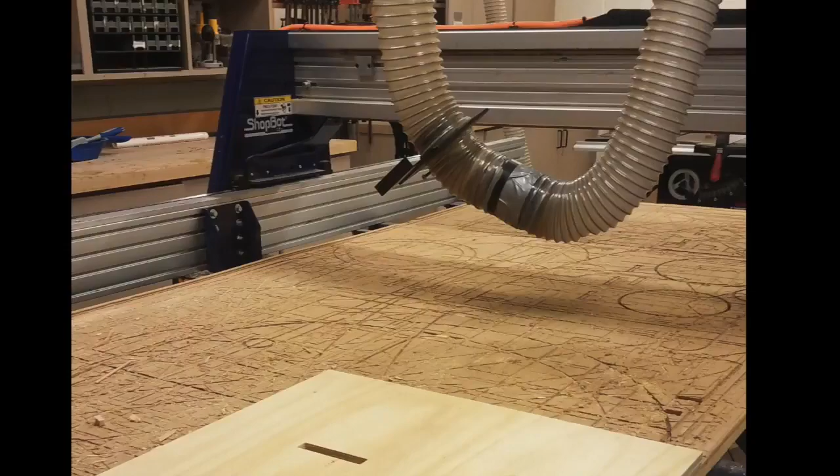Hey, I'm Ethan Bishop. Today I'm going to be showing you how to go from a completed VCarve file to ready to cut in the Shopbot. So here's my VCarve file.

First of all, before we go to the flash drive and Shopbot computer, there's a couple of things we're going to check. Make sure all our dimensions are correct, thickness is correct. Normally I like to zero to the top material because the Shopbot bed's pretty beat up, so it gives a more accurate reading. Then over here, we're going to double click on this, check some material setup settings.

We're going to check the thickness, just zero again. We want the clearance above to be about 1 inch. You can put as high as you want, this is just for fast travel. We don't want it to be too close to wood for risk of hitting something. And we just want to make sure the home start position is something sane so it's not going to go crazy.

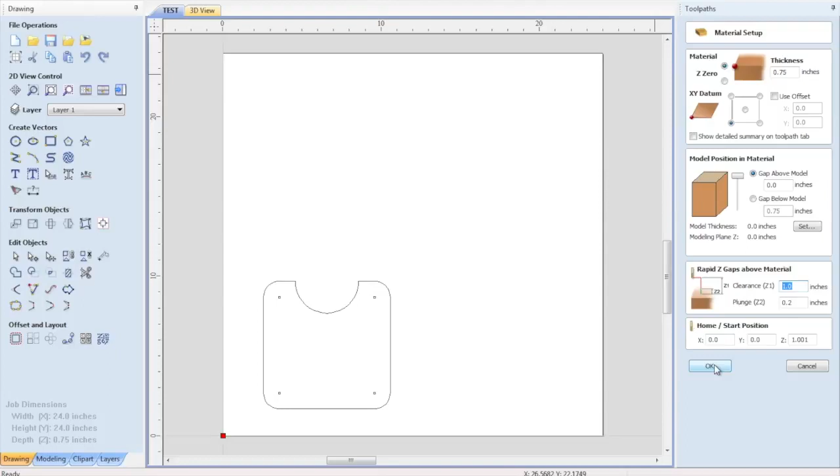And then we're going to go ahead and save our VCarve file. Save as. We're going to upload it to Drive real fast. I already have it in Drive, and then from Drive we can go back to the Windows side of our machine and we can download the file to the flash drive and transfer it over.

Okay, so once we move our file over, we're going to open it on flash drive, double click, open in VCarve real fast. It's going to be the same thing as on the laptop.

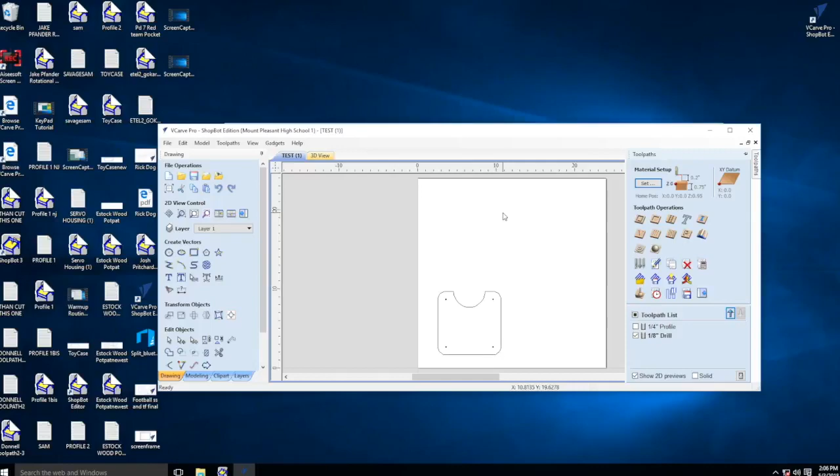So from here, what we're going to do is we're going to secure our material down to the workbed. So my material here is 20 by 24 or 24 by 24. So I'm going to place screws around the corners far away from the material. And I can use this little numbers down here to measure out for my screws. So I know after 1 foot this way, I'm clear to place a screw over, and after about a foot this way, I'm clear to place a screw wherever too. So we're going to go ahead and do that.

So after we screw down the material, we're going to go ahead and start to zero. So as you can see with the keyboard in this orientation, the arrow keys will move the different axes, left to right. Page up and down will move the Z up and down. So after we know how to move that, we can go ahead zero to zero.

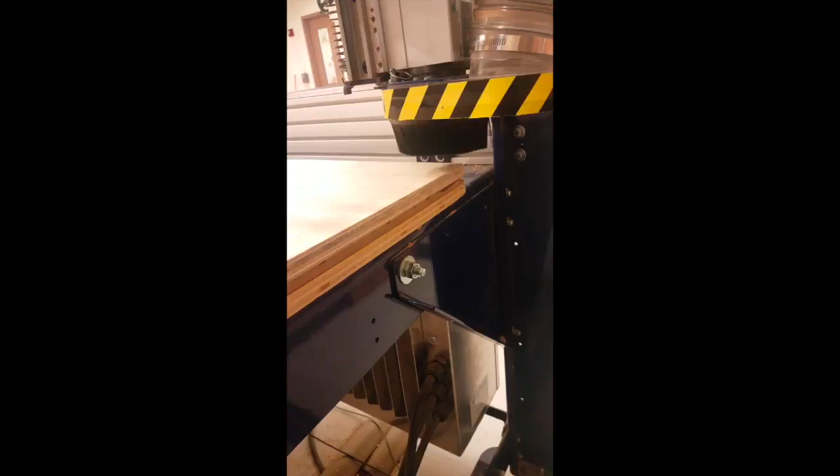We're going to lower it just above our workpiece. Then we're going to move the X and Y so it's right on the edge of the material. In the computer, we're going to determine this as a 0 point, so it's going to cut our piece in the right location. So let's go ahead and do that. See, right on the edge.

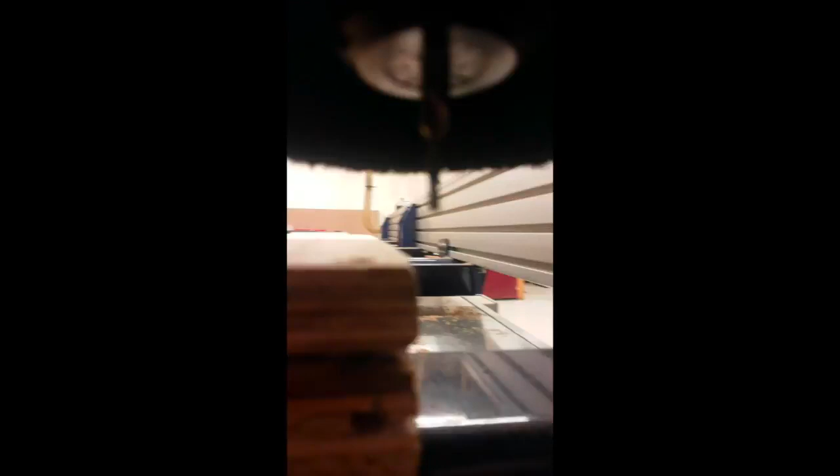So here we go to the yellow box. We're going to go ahead, as you can see here, as we move it around with the keyboard, you can see the values here moving. So once we have the X and Y in the location as we just showed before, we can click 0, X, Y, and we'll click 0, and that's going to tell the computer that this is a 0 location. And so then we can go ahead and close the yellow box.

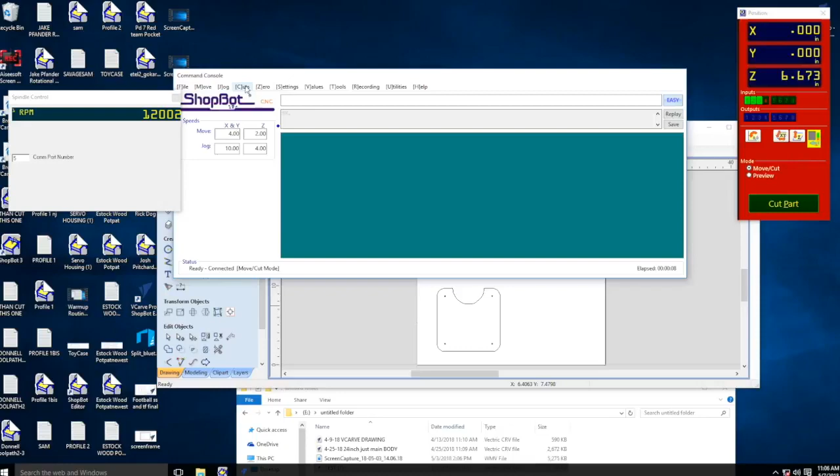And now we're ready to zero to Z, which for this we're going to have to use a different method. So first we're going to click Cuts, and we're going to be using C5, which is zero to Z axis with the zero plate. Click that, C5, and then we have to go ahead and get out the zero plate.

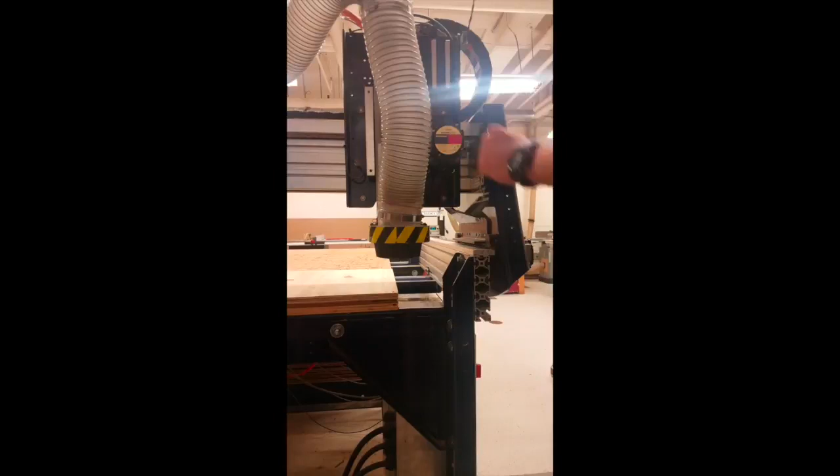So it's going to tell us to get out the zero plate. We're going to go to the machine, take that out. There's a little clip too, plate and clip. We're going to place the plate immediately under the bit, put the clip onto the bit, making sure it's not going to fall off. Once that's in place, we're going to go ahead and hit C2 again.

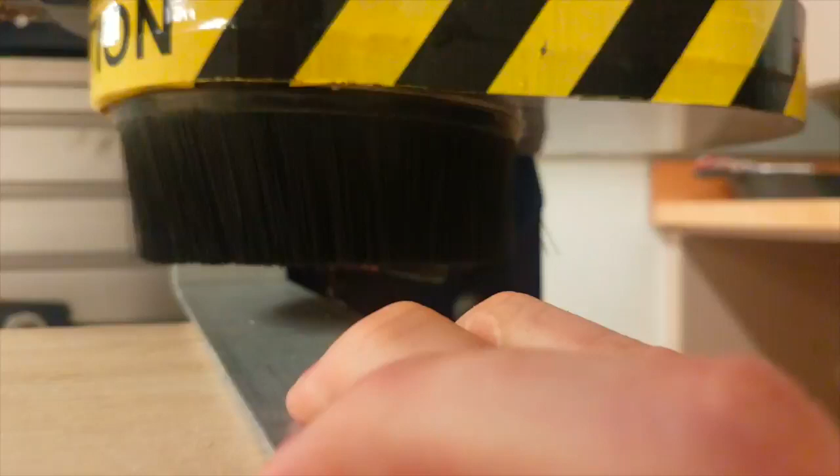We're going to hit OK to run because we're over the zero plate. The machine's going to lower the bit, hit the plate, go up once, down again, and go back up. Then we can go ahead and put away our stuff. After that, we're going to start dust collection, and we're now ready to run the file.

Okay, now since we have everything zeroed, X, Y, and Z are all zeroed, we're ready to send our toolpaths out to the machine. So first of all, we want to close the yellow window, because if that's open, it's going to mess it up. It's just not going to work, so we have to make sure that's closed first.

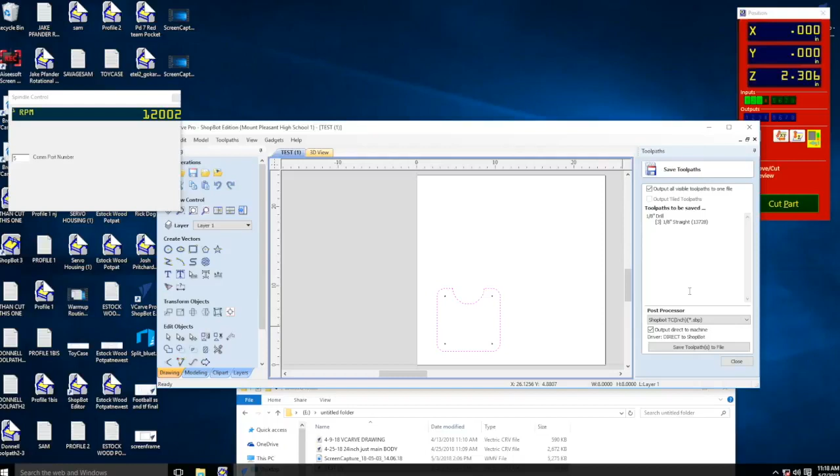Since we have the 1/8 inch bit in the machine, I'm going to select the 1/8 inch bit. I'm going to hit Save Toolpath, make sure output direct to machine is checked, hit Save Toolpath file, save it randomly, hit Enter, Enter again.

And then it's going to prompt us to turn on the spindle. So this is where you turn on the spindle, you hit OK, and then the file will run your machine. I'm not actually going to run this today, so I'm just going to hit cancel.

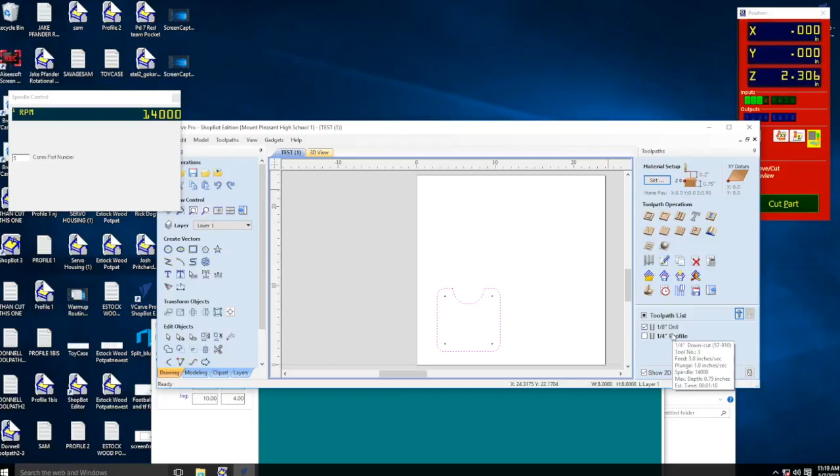And after that, since my next toolpath requires a straight bit, or a 1/4 inch straight bit, I'm going to have to change bits in the machine, so let's do that real fast.

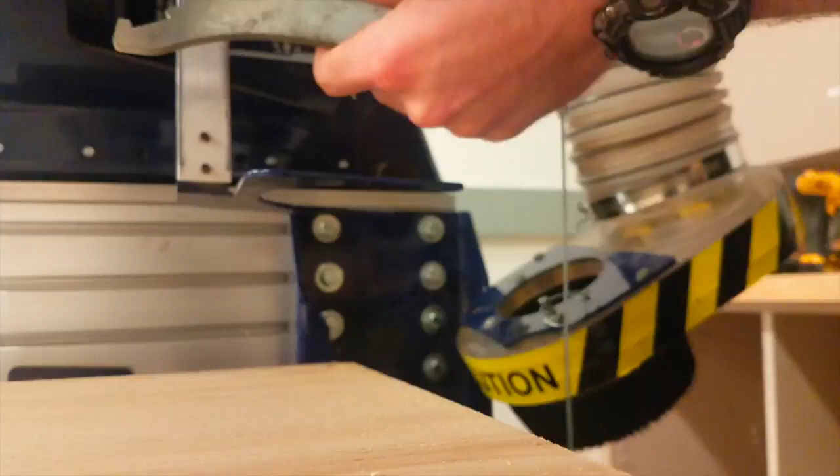Okay, so here's just a brief overview of how to change bits. We'll first get our spanner wrench, or get out our crescent wrench. For this, we're going to have to remove the dust collection, which is a little complicated. We just loosen the knob, pull it down, pull the pin, pull it out. This is just a brief overview, so it's not going to tell you exactly what to do.

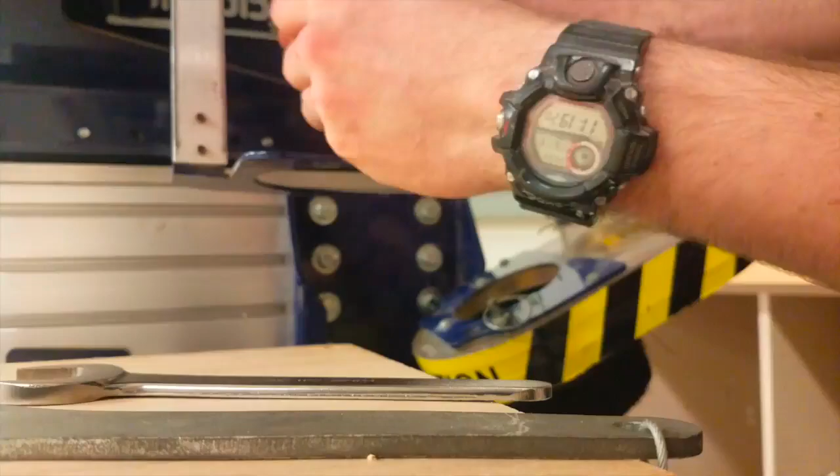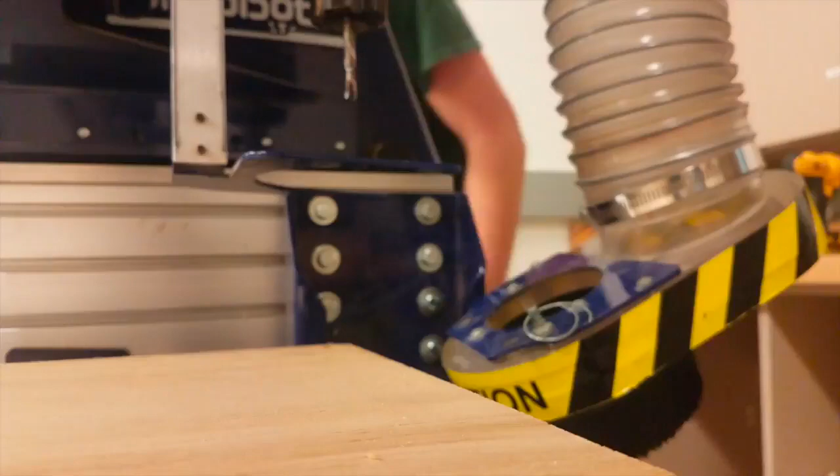From there, we're going to put our spanner and crescent on, push them together in order to release the bit. We're going to take out a different bit, put it in, tighten it back up with the same wrenches. We have different collets, all sorts of stuff for different bits, but I'm not going to get into that right now. Once we're done, we're going to put our wrenches away and come put the dust collection back on.

Okay, now since we've switched bits to the 1/4 inch bit, we're ready to run our second toolpath. First of all, we're going to go ahead and close the yellow window again, open this up, and select just the 1/4 inch, making sure we deselect the 1/8 inch. Hit save, direct to the machine, save toolpath, Enter, Enter, Enter.

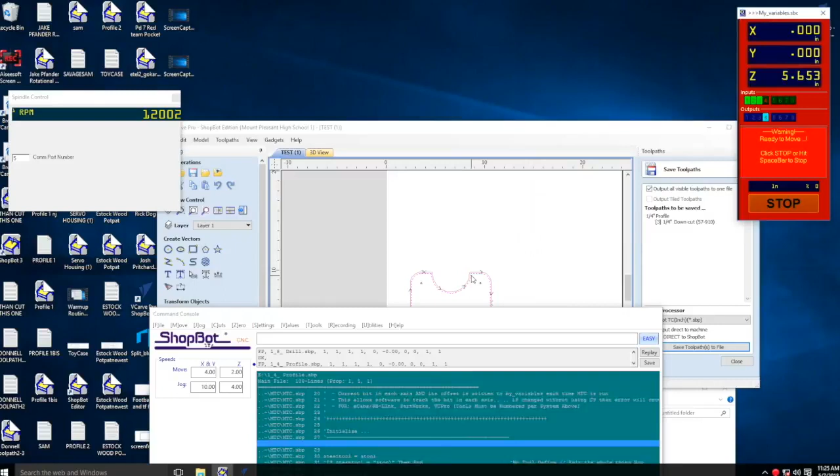And then it's going to prompt us to start the router, which we're not going to be doing today. But you hit OK, we'll start it up, and then we'll go ahead and run your file.

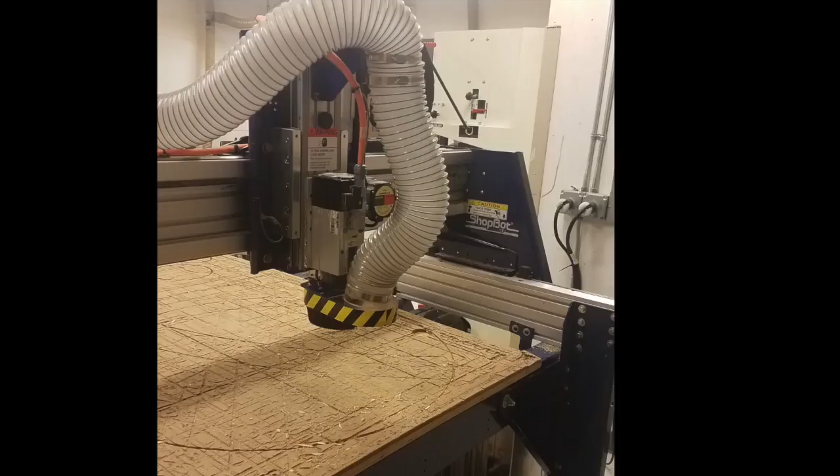So in conclusion, I hope this video gives you a general overview of the ShopBot, what to do, what not to do, hopefully make you safer on the machine as to not damage it. It's a very capable machine, very strong, so resilient to errors, but it's always good to have proper practice so we don't cause unnecessary damage to it.